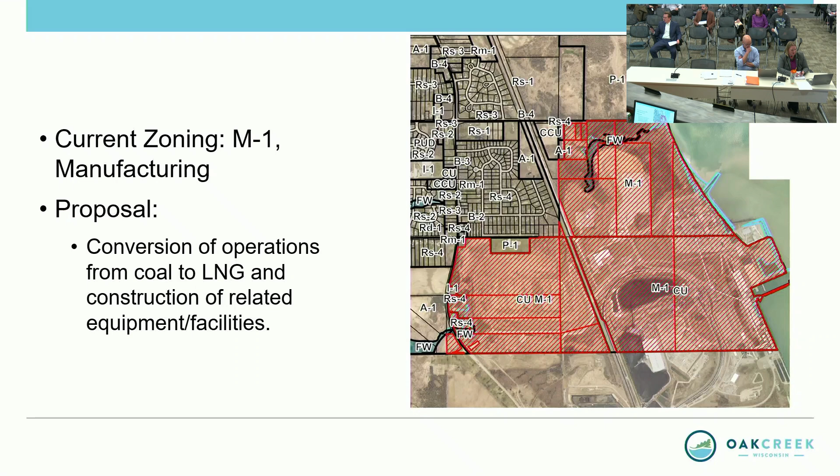Thank you, Mr. Mayor. The item before you is a conditional use permit amendment. We Energies went through a conditional use permit process in 2003 for their coal operations, and this proposal has been very public. They're in the process of converting their operations from coal to liquefied natural gas, which will require construction of related equipment and facilities. The exterior plans for the buildings will be reviewed by the Plan Commission at a future date. This item before you is for the conditional use permit.

As I mentioned, it's an amendment. The category in our zoning code is major utility, which is pretty broad for a lot of reasons. Obviously, We Energies and their facility falls into that category. They are converting all their units to natural gas by the end of 2032. It's a long process, just starting the approval process right now.

The coal piles will eventually be removed. The large main pile will be replaced with a new storage tank. And then there will be conversion to include construction of 5 natural gas-fired combustion turbines.

The public hearing may be scheduled as early as Monday, February 17th. That public hearing will be in front of the Common Council. So the Plan Commission's role this evening is to provide a recommendation to the Common Council. The public hearing for public comment is held in front of the Common Council on that Monday, February 17th. It's oddly a Monday. There is an election on Tuesday, February 18th, so just a side note there.

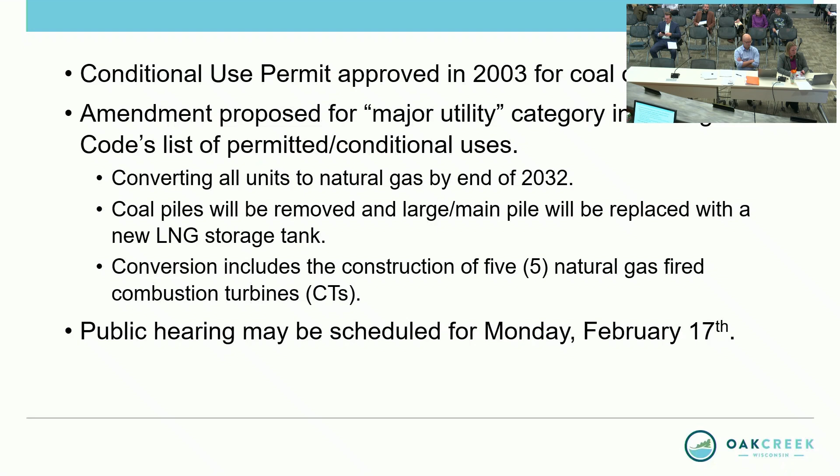The conditions and restrictions, as you may recall, last month we talked about combining what used to be 2 agenda items into the conditional use permit and conditions and restrictions, considering both of them this evening. I'm not going to go into all detail, but the basic restrictions are that it's a public utility use. The operations are obviously 24/7, 365 days a year. The 2003 conditions and restrictions are very, very detailed. They went over easements, construction hours, shifts, water supply, traffic, construction traffic, main traffic being limited to Highway 32, and noise levels of operation and during construction.

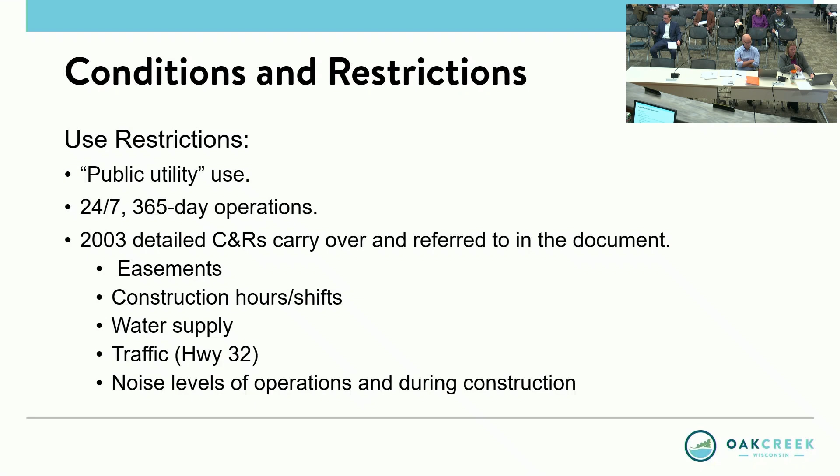And those 2003 conditions and restrictions are carried over with the new document. It references the conditions and restrictions from 2003. With that, I would like to turn it over to We Energies representatives, who will give a much better rundown of their operations than I will. They have a presentation that was provided in your packets, but with that, I'll be turning it over to Rick O'Connor with We Energies.

Oh, Rick is not done. I'm sorry. Thank you. Do you want the clicker, or do you not need it for Rick? Okay, my thing is just going to be really quick before Rick gets up here.

So, good evening. My name is Jennifer Bogner. I'm the Director of Local Affairs at We Energies. We're here in front of you tonight, obviously, to talk about the Oak Creek facility, but I just wanted to give you a little background on the reasons why and sort of our overall plan.

Some of the drivers that we have seen for what we're doing is economic development. We all know about Microsoft, we know about the need that they have, but there are plenty of other economic development projects in Oak Creek and other places in this region. We have bigger companies that are adding on. Eli Lilly just announced a big project, Haribo, Uline, and we have to address those needs. So that's one of the big drivers. A second reason why we're doing this is there's been some shifts in the rules that govern us. MISO is our regional grid authority.

They do all the grid planning for this part of the country, and they've shifted the way they look at things. In the past, they've taken the peak for the year, summertime here, and done all their planning around that one peak. What they've done is shift to a seasonal peak model where they look at each of the 4 seasons and plan around the peak for each season, which shifts the way they do things.

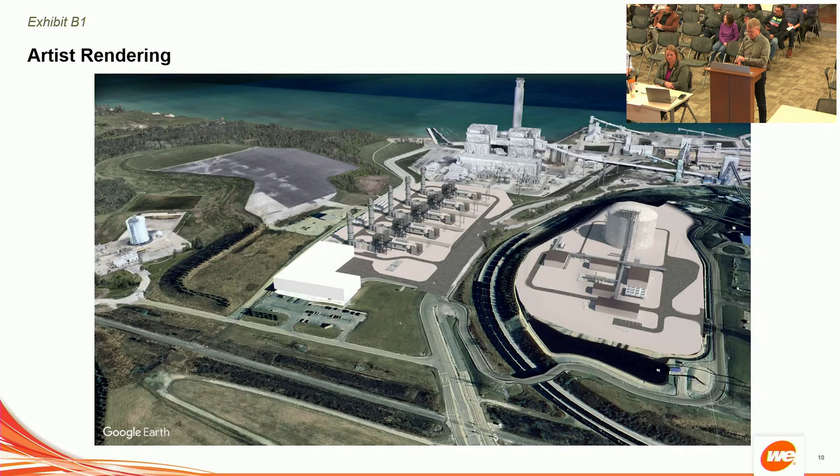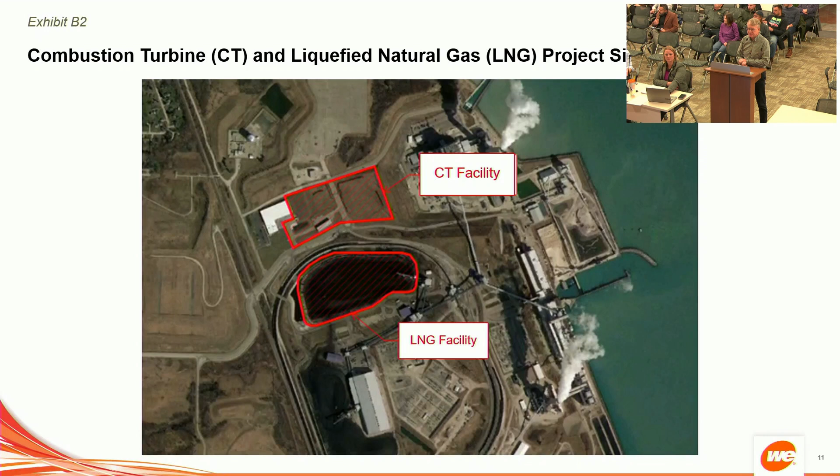The combustion turbine project will include 5 General Electric combustion turbine generators. This really is the workhorse of the industry. There's probably 1,000 General Electric combustion turbines out there in the U.S., and around the world in operation today. It came out in the 1990s. We have quite a few GE 7F combustion turbines in operation. It's a reliable machine, and it's also a fast start machine.

So it'll complement the coal plants, and it'll complement the wind and the solar, so it can follow the electric load and make sure we're able to provide power to the customers. It has an expected capacity factor of 20%. So this will be a little bit different than the coal plants—it will not be a base load plant, not going to be operating all the time. It's really intended just to fill the gaps for when the renewables are not available.

We will have a new natural gas line that'll come in through Racine County into the site. It's called the Rochester Lateral, and we'll also connect into the Lakeshore Lateral. That'll bring additional natural gas into this area.

We will interconnect to the ATC substations. ATC is the transmission company. It's one of the reasons why we're locating this plant at this site. Essentially, this is where we plug the 5 combustion turbines into the grid. There are 2 existing substations there already. When we shut down the coal plants, essentially we're going to unplug the coal units and replug the 5 natural gas combustion turbines back into those ATC substations. It's a pretty long, complicated process to get approvals to plug into the grid, so it's a significant benefit to be able to utilize these existing substations, as well as a significant economic benefit.

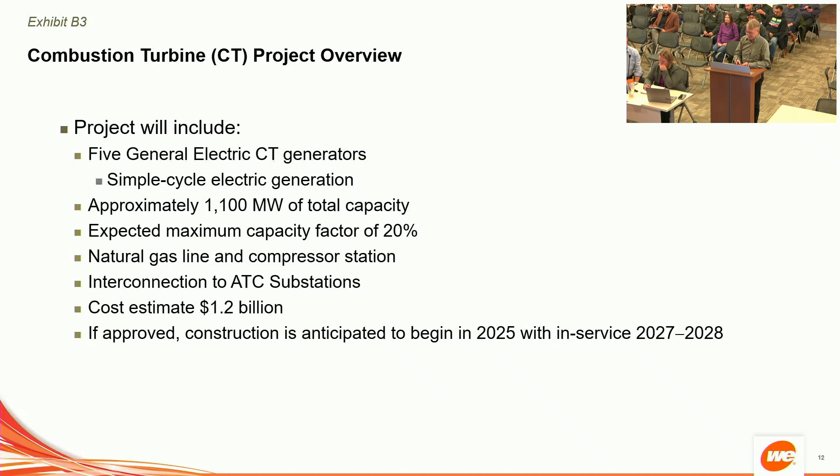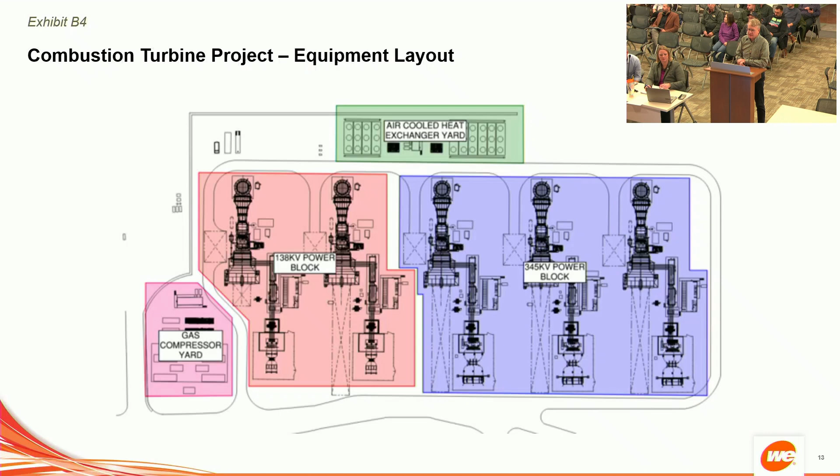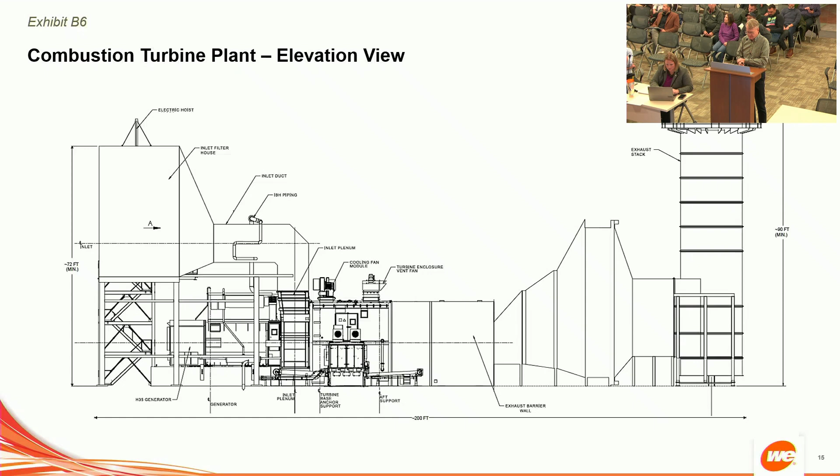Switching over to the liquefied natural gas project, quick overview. What we're proposing here is very similar to 2 projects that we just built. We just built 2 1-BCF liquefied natural gas tanks, one out near Whitewater, one up near Ixonia.

This is a cold day. We're glad to see that they're operating today to provide LNG into the gas system, really for heating homes on cold days like we have today.

There's really 3 components: the tank, the liquefaction equipment, and the liquefaction equipment is really like refrigeration equipment. We're converting the natural gas in vapor form into a liquid, and in liquid form you can store 600 times the volume of the vapor. That's the reason we're turning it into a liquid.

We put that liquid into the tank, and then in the winter, on cold days just like today — we've been running for about 30 hours on the project out at Whitewater — we pull that liquid out, we warm it up in what's called a vaporizer. It's really just a warm water bath. You warm it up and it turns right back into natural gas, and you put it right back into the system.

So the benefit is, it kind of acts like a coal pile. You have a local storage of fuel right here. You're not dependent upon a pipeline coming from Texas or Oklahoma.

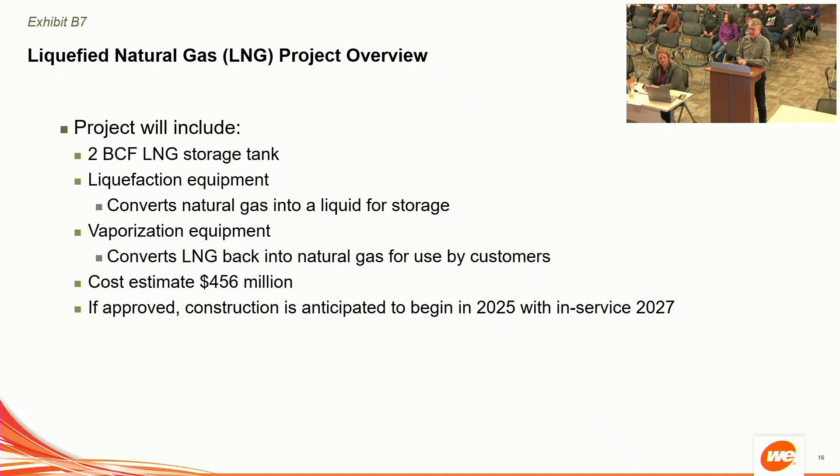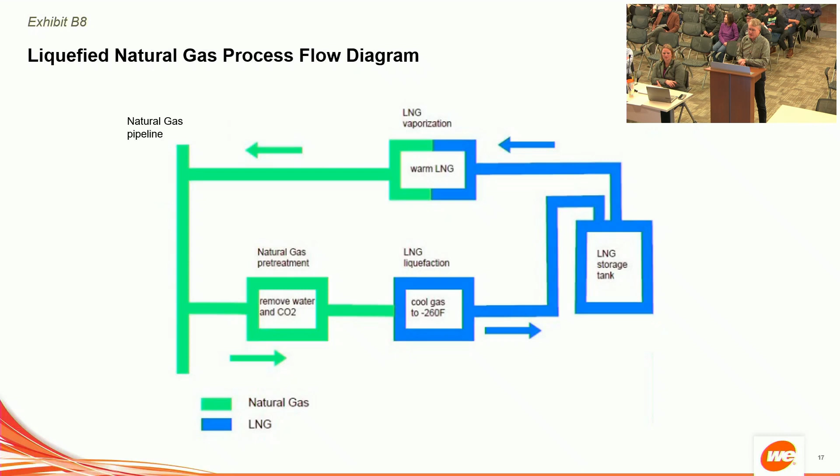You put that liquid in the tank, and we really run that liquefier all summer to fill the tank. Then on cold winter days, or any other time of year where we're coming up short on natural gas, we pull that liquid out, warm it up, and put it right back into that same pipeline.

It's a pretty straightforward process, and you're probably aware there is a smaller LNG tank already on the Oak Creek site. It's about a quarter of a BCF, and that was put in, I believe, 1965, so it's been there for 50 years. This really is the same process, same concept as what's been out there since 1965, but on a larger scale.

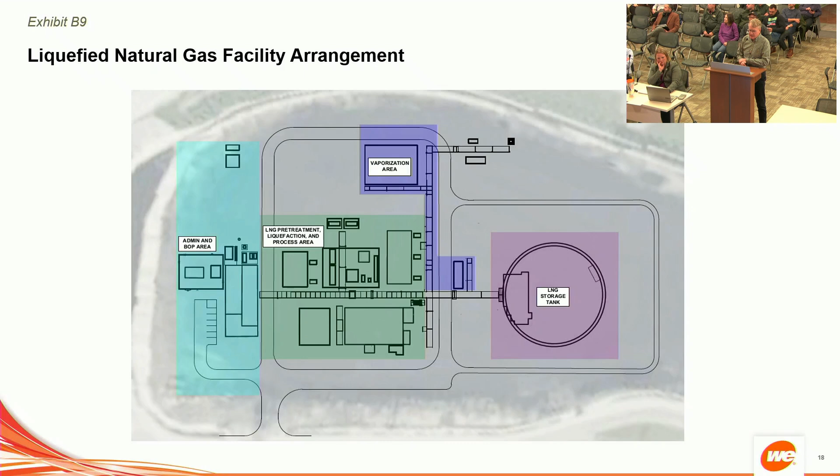I won't go through all the detail here unless you have questions. It's really just the layout of the equipment. Probably the big part is the tank itself. The tank is at its highest point 170 feet high, 206-foot diameter, and there's really 2 tanks.

This is what's considered a full containment tank. On the inside, there's an inner tank made out of 9% nickel, which is the alloy capable of holding the low temperature liquid in the tank. On the outside, it's a carbon steel tank with up to about a 3-foot concrete containment wall around that.

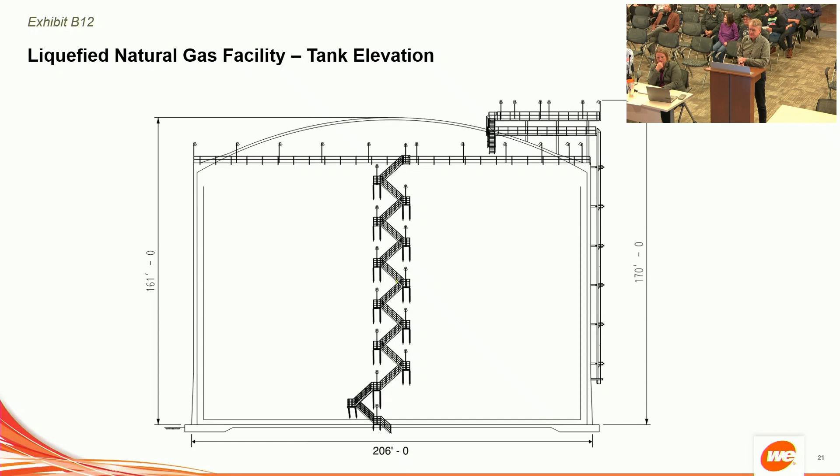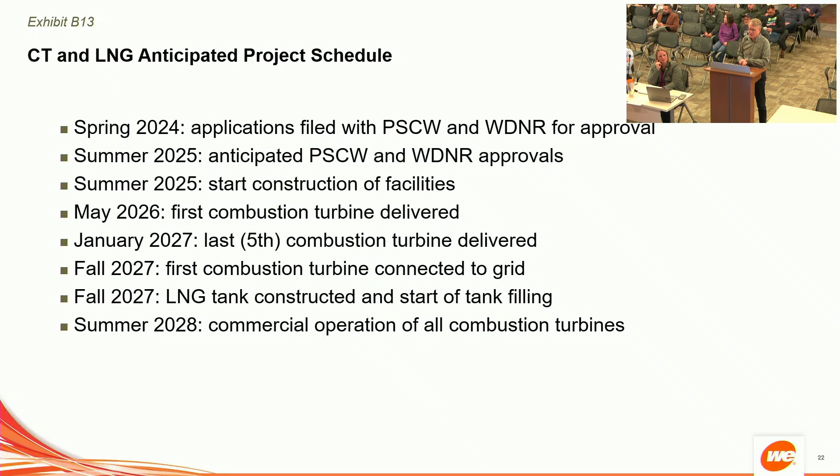We'll get that first combustion turbine running, connected to the grid by the end of 2027, as well as get the LNG tank constructed and starting to fill by the end of 2027. Then that last gas turbine, of the 5 turbines, will be put into operation during the summer of 2028.

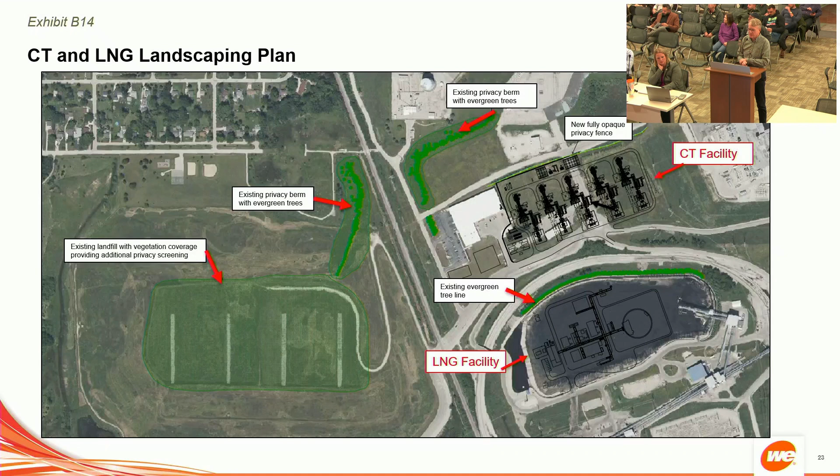So a lot of info, but we can certainly come back. This is just a quick overview of the landscaping plan. A lot of this landscaping has already been installed, and a lot of the berms have already been installed as part of the Elm Road project.

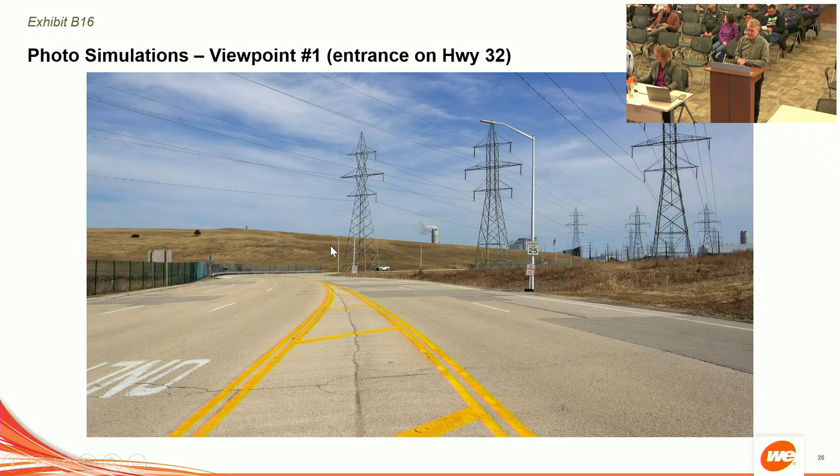That's what's right there. We do have another view from Haas Park, essentially on the east end of Elm Road, where you'll get a view of the 5 combustion turbine stacks, and over to the right there you'll get a view of the LNG tank. So these are photo simulations, just really intended to give you a feel for what the facility would look like from the neighbor's perspective. Haas Park, as you're probably aware, is the park right over by Barton Oaks subdivision.

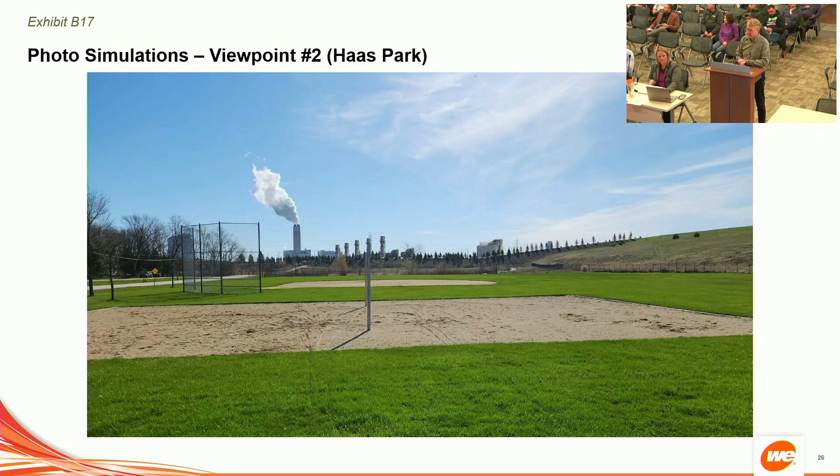This really is the nearest neighborhood to the Oak Creek site. That's a little closer on Haas Park, right at the end of Elm Road. You get a closer up view of the combustion turbines, as well as the existing LNG tank, the blue tank off to the left there. Again, that's the tank that's been in there since 1965, and that is it. Thank you.

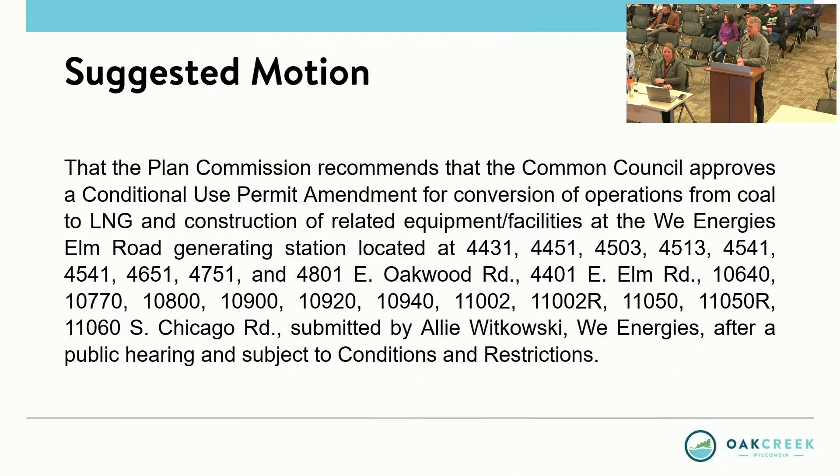Number one, production. Does the production of the liquid gas match the current production you had with the coal previously, or is it more or less—how is that matched? Do you have a chart that shows the analysis? That's a good question. The way the LNG works is we essentially fill the tank up. It holds 2 billion cubic feet of natural gas, and that'll take us about 200 days in the summer to fill that tank. We run that all the way until you get the tank full.

Then at times when we're low on natural gas, typically in the winter on a cold day like today, we will draw that liquid out of the tank and run it either to the combustion turbines, or it's connected to the natural gas distribution system, where it goes to homes to provide natural gas for heating on their furnaces.

The hours of operation—is it going to be 24/7? Yeah, hours of operation will be 24/7. These facilities could operate at any point. These are really peaking facilities. The gas turbines are peakers. This is when we need electricity, that's when these units operate. They are expected to only operate about

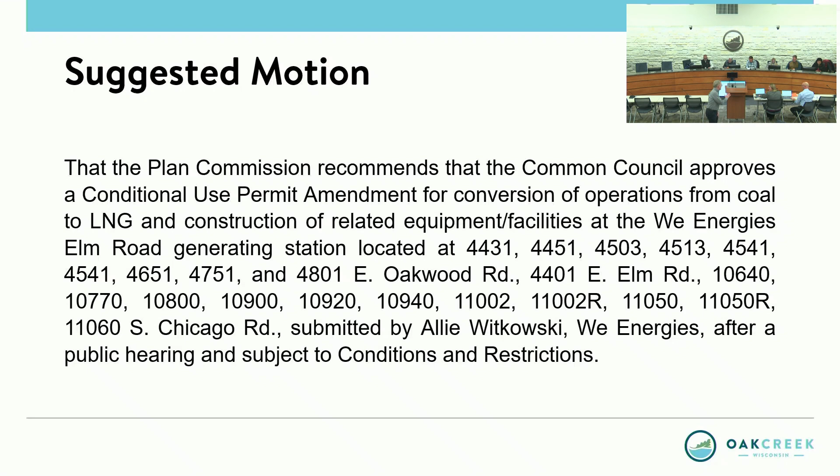Okay, moving on. Item 5 is a site review plan related to the construction of a new ATC control building to be located at 10770 South Chicago Road, submitted by Sarah J. Lamp, ATC, LLC.

Christie: Thank you, Mr. Mayor. This item is related in some minor shape or form, mostly because it's on the We Energies property, but this is a really small proposal for construction of a new control building buried deep within the transmission field that no one will even see.

Just want to make also a side note, there was a typo in the report. I accidentally did some copying and pasting and forgot to delete the last 3 paragraphs in your report. Should test who caught that. So my apologies for that.

But the proposal is to construct a new control building, shift it a little bit further north than its existing location. It's constructed of corrugated metal, not a material we typically would approve at the Plan Commission level. However, given the small size of 24 by 60 foot building and the fact that absolutely no one will see this building, staff is recommending approval for that main reason.

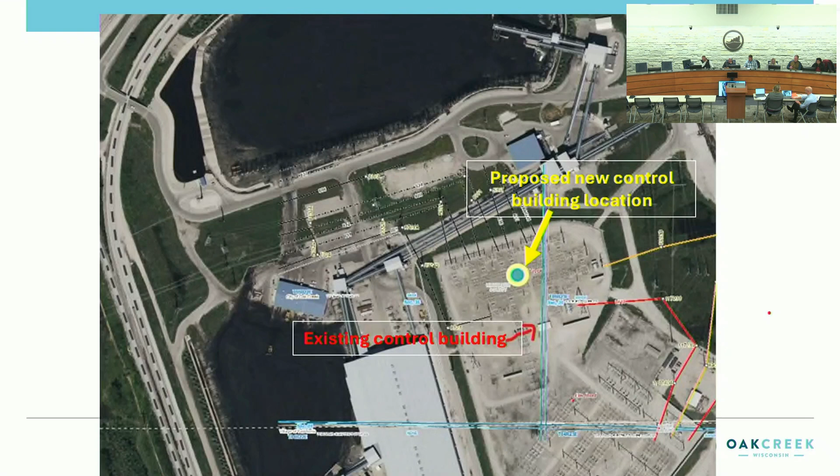Guzekowski will second. Roll call, beginning with Ashley. Chinsky, aye. Lorick, aye. Kavich, aye. Guzekowski, aye. Anna, aye. Ouch, aye.

Item 6 is consideration of a certified survey map combining the properties at 8910, 8940, 8980 South Ridgeview Drive, submitted by Ivan Basilic.

North Investments LLC. If I butchered your name, I'm sorry, I apologize for that. Christie, thank you. We're laughing because I just realized I'm advancing the slides on my own laptop and wasn't advancing them for you guys. I'm sorry, controlling two laptops at one time here.

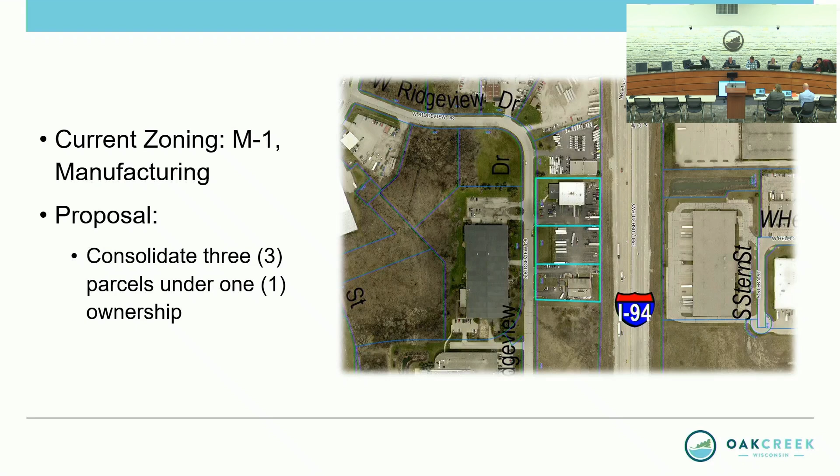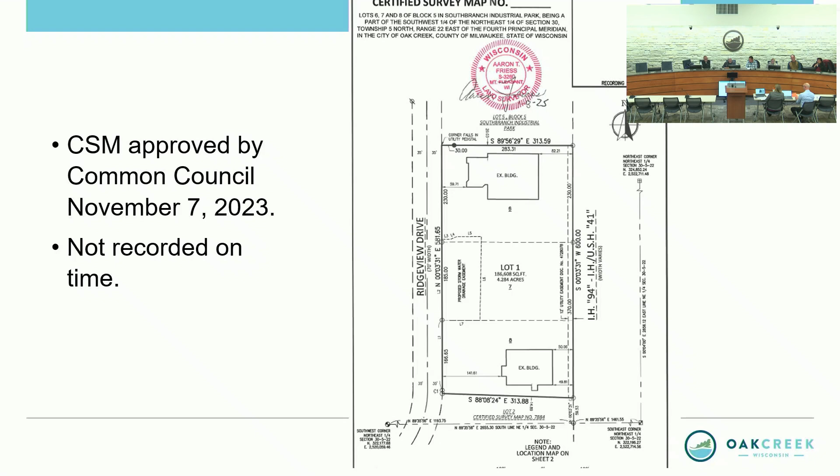Thank you, Mr. Mayor. This item was before the Plan Commission a little over a year ago and was never recorded. This is to combine 3 parcels under the same ownership. It was reviewed and approved by the Common Council on November 7th, unfortunately not recorded on time. State statute states that the approval becomes null and void if it's not recorded within 1 year of approval. So it's pretty straightforward, and staff is recommending that the Plan Commission recommend Common Council approval, and we'll make sure to get this recorded as soon as possible.

Ashley, anything? No questions. Greg? No questions. Chris? No questions. Christine? No questions. Steve? No questions. I myself have none either. It's just an unfortunate miss.

So, if there's no further discussion, motion on 6: Clerk moves to recommend to the Common Council that the certified survey map submitted by Ivan Vasilievich, North Investments LLC, for the properties at 8910, 8940, and 8980 South Ridgeview Drive be approved with the following conditions: Number 1, that all technical corrections, including but not limited to spelling errors, minor coordinate geometry corrections, and corrections required for compliance with the municipal code and Wisconsin statutes, are made prior to recording.

Guzekowski will second. Roll call, beginning with Greg. Lorick, aye. Kavich, aye. Guzekowski, aye. Anna, aye. Ouch, aye. Chinsky, aye.

Item 7 is a site plan review: to review site and related plans and landscaping modifications to TNT Express, an existing building located at 8910, 8940, 8980 South Ridgeview Drive. Christine?

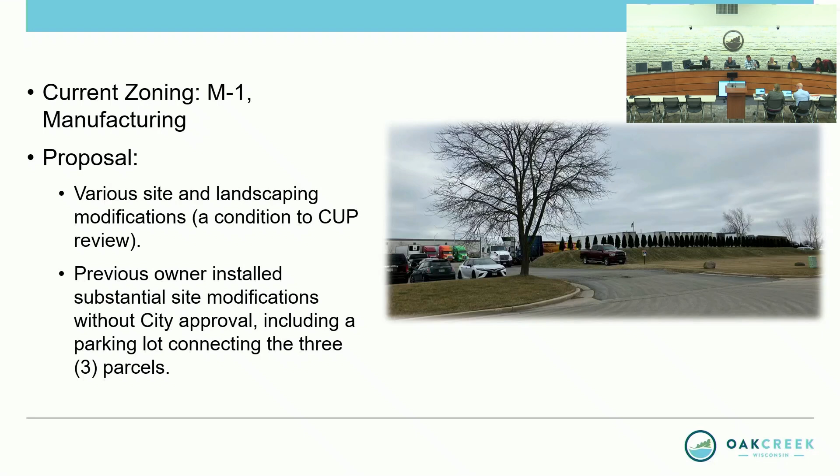This is a chopped-up panoramic view. It's a really long site from Ridgeview. You've got a building on the very north end at 9810, the middle piece which is paved without city approval, and also the landscape berm on the west side of the property. Then you have a second building at 9880 on the south bookend of the property—so three pieces tied as one here. What's proposed is to install landscaping on the very east; north is to your left in this view, so the east abuts the interstate and the west is Ridgeview, and the green shaded areas are new landscaping that's proposed.

It's a big sea of asphalt on this site. And with that being said, the middle area was paved without city approval, so stormwater management and retention is necessary.

The berm that you see here, the previous owner installed thinking this is a good solution to screen the semi trucks that are being worked on and parked there. Unfortunately, it doesn't meet the stormwater management requirements.

Engineering is working and having constant communication with the consultant, and the city's consultant, R.A. Smith, has commented back about some modifications. We're making progress on the stormwater management plan that's been submitted. That berm will actually be removed, and a retention area will be installed with some landscaping, not as substantial as what was there, but we have stormwater management requirements that need to be met.

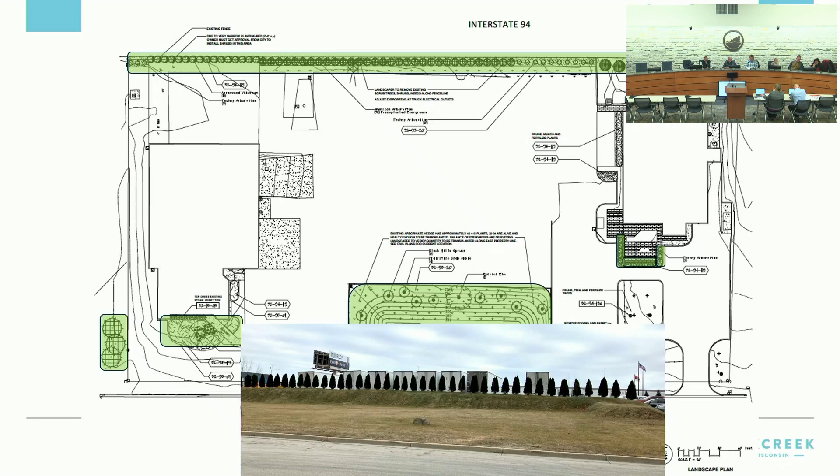Again, the semi-trailers are being worked on. That's the user, the tenant is auto repair of semi-trailers. That's why the large area in the middle for parking of semi-trucks is necessary.

With that being said, that's the conclusion of the proposal for the site modifications, and staff is recommending approval subject to the conditions in front of you.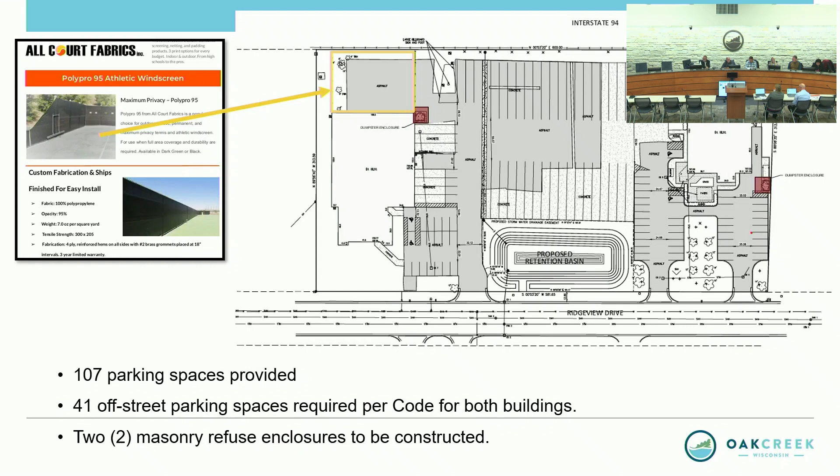Really no further comments, other than you inherited a property that had a lot of improvement needed because the former owner just kind of took it upon himself to do what he was going to do. But I'm glad to see you're taking time and doing it right, and just want to express appreciation of the staff and the city to do things right. We do value you as a business, but we do want to do things correctly here in the city of Oak Creek. With that, I have nothing else, so we can move on to a motion.

Clerk moves to approve site and related plans for site and landscaping modifications at TNT Express, an existing business located at 9810, 9840, and 9880 South Ridgeview Drive, submitted by Ivan Vasilievic, North Investments LLC, with the following conditions: 1, that all relevant code requirements remain in effect; 2, that revised plans be submitted indicating the fence height and required parking calculations per code; and 3, that all revised plans are submitted in digital format for review and approval by the Department of Community Development prior to the submission of permit applications.

Guzekowski, second. Roll call, beginning with me. Bukevich, aye. Guzekowski, aye. Anna, aye. Ouch, aye. Jinsky, aye. Lorick, aye.

Item 8 is conditional use permit with conditions and restrictions. It is the review of the request for that conditional use permit, along with conditions and restrictions, for an animal daycare, recreation, and kennel boarding facility shelter at Houndstown USA, a proposed business to be located at 7126 South Millers Way, Suite 101, 102, submitted by Andrew Cromie, Cromie Corporation.

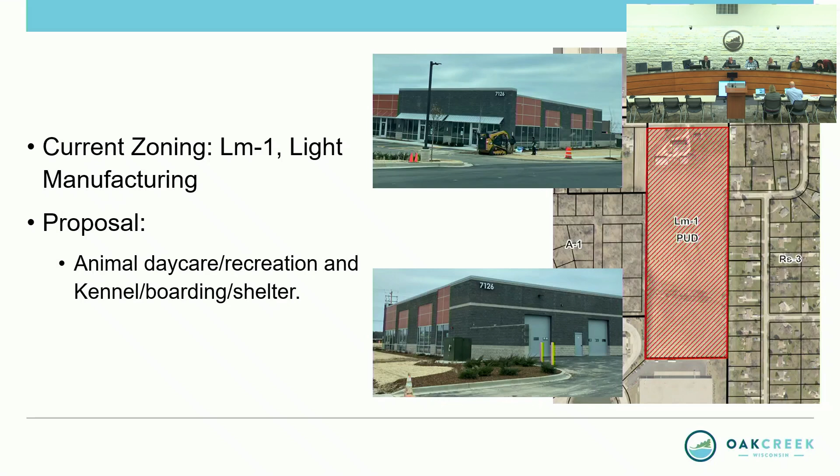Thank you, Mr. Mayor. The property, located on South Millers Way and East Rawson, used to be 517 East Rawson. It's zoned LM Light Manufacturing and is the site of a new multi-tenant light industrial building. Houndstown USA is looking to occupy part of the building and is seeking a conditional use permit for animal daycare, recreation, kennel boarding and shelter. Here are a couple of photos of the new building and the portion they'll be occupying.

They'll be occupying the phase 1 building, the western two suites, suite 101 and 102, which is approximately 6,000 square feet.

Here's an idea of how they'll be using the space. The pink area is for the daycare portion, the yellow with kennel areas is for boarding dogs, and the purple area is for grooming. Those will be the main uses of the building.

They say they have a capacity of up to 90 dogs, but more likely would have about 50 dogs on site at any given time. They will be boarding dogs 7 days a week, 24 hours a day, 365 days a year, but will have operation hours for drop off and pickup for daycare: Monday through Friday 6:30 to 7, Saturday 7 to 5, and Sunday 11 to 1.

You received full conditions and restrictions in your packet. To run through a couple: they will be required to have sound dampening walls built parallel to the demising walls to mitigate sound. There will be no outdoor activity or operation permitted, including dog runs or play areas outside, and they won't be allowed any outdoor storage on site.

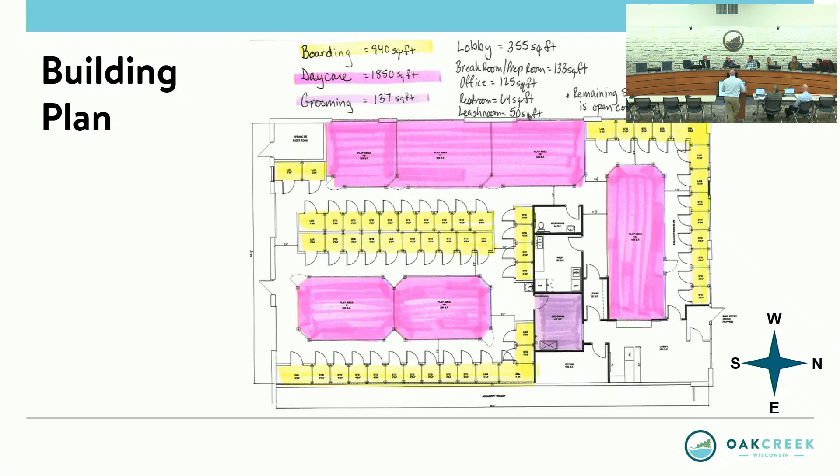I'm sorry for bringing it up, but I think we should restrict conditions to the local ordinance on how many dogs are allowed in a boarding facility. We went round and round with this for the new Brentwood facility, the Camp Bow Wow. I thought it was over 100 though.

Yeah, so it is under the kennel and boarding facility section, under service uses: dogs kept on premise will not equal more than 15 per acre of land. Todd had done the calculations and it's underneath that, it meets the code. Okay, take your word for it.

And dog runs shall not be used between 8 p.m. and 8 a.m., which doesn't apply here since there's not a dog run. The calculations, was it 20 for the cats? Minimum lot size for a kennel shall be 2 acres, which this meets, it's a really large property.

Okay, but thanks for bringing that to our attention, we'll double check. And then lastly, Amy, don't mean to throw you to the dogs, bad pun, any concerns from fire? Yep.

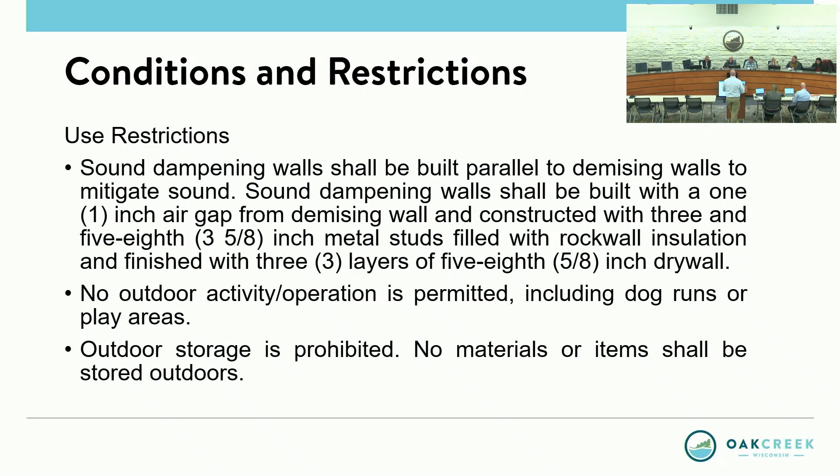Oak Creek Fire Department: for these animals that are there for 24 hours, what's the life safety plan for these animals? Should something happen in the building, as far as exits and a firefighting operation of rescuing these animals that are in there without humans?

Our facility will be sprinklered, and there are access points both in the front and rear of the facility. Nobody's there overnight, so should that emergency happen, the fire department would be rung up right by the sprinklers and they would be on site. We would be called by that fire safety system, so we would be coming as well. Does that answer your question, Amy? Okay.

Otherwise, no, I have no further questions other than the two I brought up. So if there's no further discussion, motion?

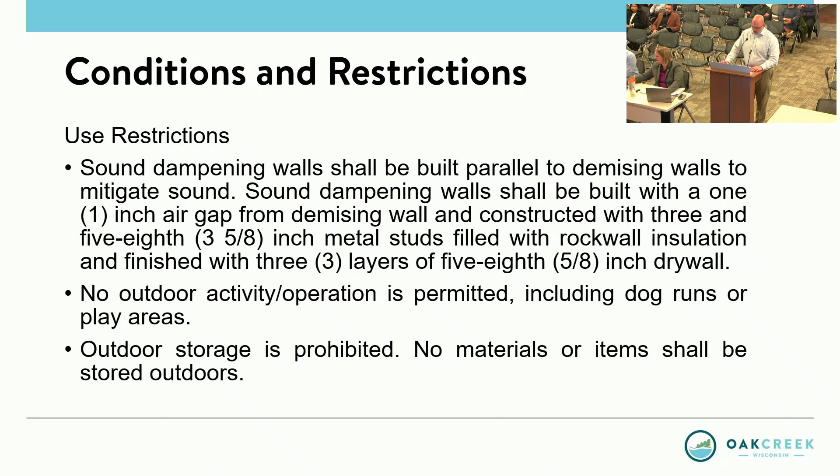York moves to recommend that the Common Council approve a conditional use permit for animal daycare, recreation, and kennel boarding shelter for suites 101 through 102 on the property at 7126 South Millers Way, submitted by Andrew Cromie, Cromie Corporation, after a public hearing and subject to conditions and restrictions. Guzekowski seconds. Roll call, beginning with Chris.

Guzekowski, aye. Anna, aye. Ouch, aye. Jinsky, aye. Lorick, aye. And, excuse me, Bukevich, aye.

Item 9, we'll review a request for a conditional use permit along with conditions and restrictions for permanent outdoor storage at Kalik Building Services, an existing business located at 3834 East Puetz, submitted by Mohammed Kalik, Kalik Builders.

Christie or Todd? That's me. Yes, as you mentioned, the property, which is zoned M1, is occupied by Kalik Construction Services, and they're seeking a conditional use for an outdoor storage permit for storage shipping containers. I have pictures up of the existing building, viewing it as you're coming up, going east or west on Puetz.

As you can see from the site plan, they are proposing to have those storage shipping containers in the rear lot, at the north end of the property. They're proposing to have 8 containers in total, 4 of them 8 by 40 and 4 of them 8 by 20 in dimension.

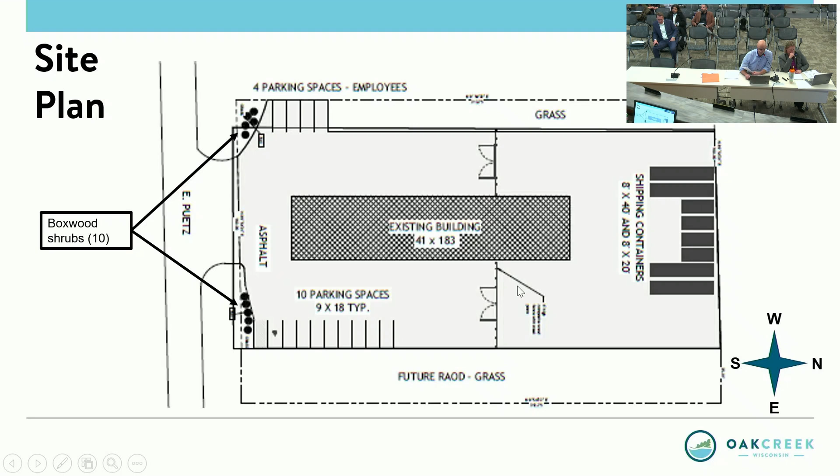They'll be planting 10 boxwood shrubs along the right-of-way to act as screening, and in addition putting up a fence on the property parallel to the road, a little bit past the building at frontage, to provide for screening. The fence is going to be a 6-foot high composite fence, and they provided a couple examples of what it will look like.

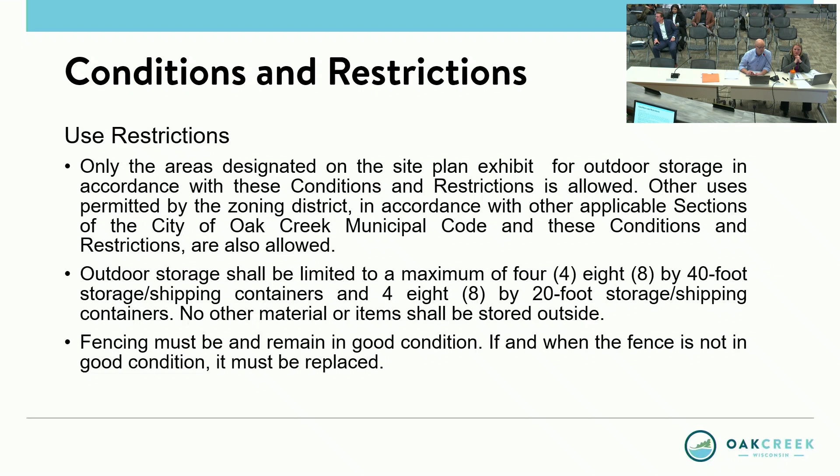Just a couple highlights on some of the conditions: the approval will be for storage of these containers only as shown in the location on the site plan, and they'll be limited to the number of containers shown, being 8 in total. They must have the fencing, and it must remain in good condition, and if it's not, it must be replaced. So if you're comfortable with the proposal, we have the recommended motion.

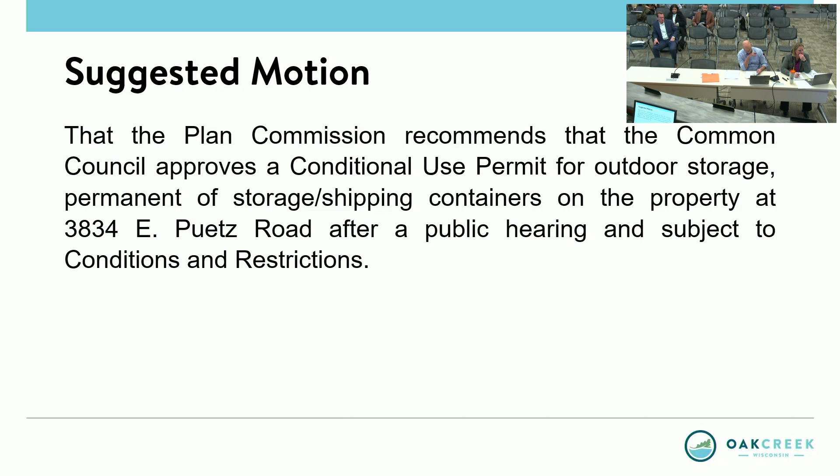Okay, does the applicant want to say a few words? Or wait? You'll wait? Okay, where did I start? Chris, wanna start us off?

No questions. Christine? I have no questions. Steve? No questions, looks like a nice looking fence. Ashley? No questions.

Greg? A couple questions. The first one, this might not be related at all, but can you go back to the aerial view of this site? This may be an old picture, but what are all the cars? Are those all employees? I will need you up at the podium, sir, name and address.

Mohammed Khalek, 3834 East Puetz Road. No, this is a very old picture. Oh, so that's not currently what it looks like. Yeah, okay, I wish I owned that many cars, but I don't. It's from 2022.

Secondly, the storage in the containers, is this temporary, or is this going to be long-term permanent storage? No, basically when we're working on a project, for lead time we pre-order material and get it stored. When it's ready to be delivered to the job site, it gets delivered. Does the whole container move then? No. Are these containers always going to be there? You're just going to rotate the inventory? That is correct.

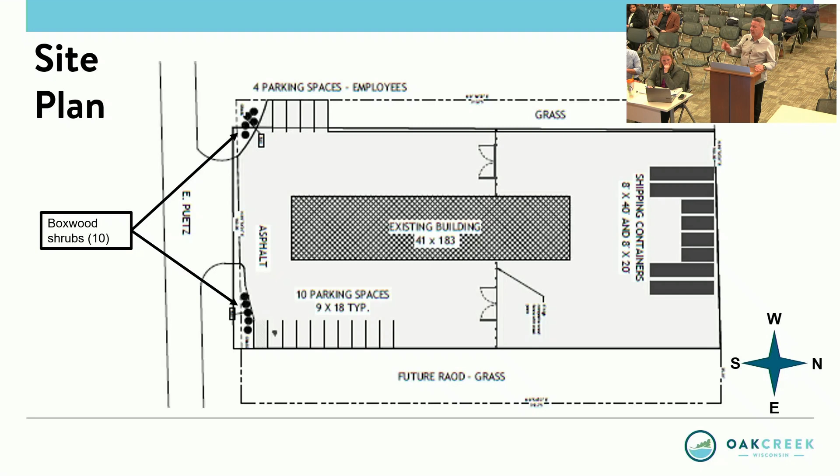My question is, I'm actually happy that he's doing this. One of my questions to the gentleman is, what is the plan heading west to that building? In the picture you show, it looks awesome, but to the west is just a broken down fence, an old boat, and I can literally see it from my backyard. So I'm happy he's doing that and not opposed to the new stuff, but my question is, maybe not for now, but what's going to happen to the west part of that space? It's probably twice the size of the current lot, somewhere around that length.

Okay, we'll get the applicant up, maybe he can answer for you. Sir, could you come on up, please, and answer his question.

It looks a lot better than a few years back. But I would ask you to turn your light down on your side. The what? The light on the sign? Yeah. Yeah, I'll check on that.

So we purchased the lot to the west, I believe we closed on it last year, and of course from the county we inherited some contamination there, DNR related. So we're currently working on that. We do plan to clean it up eventually, but we're letting it go through the DNR process. And like I said, we're planning on proposing something for the addition, and I promise you it would not look like that.

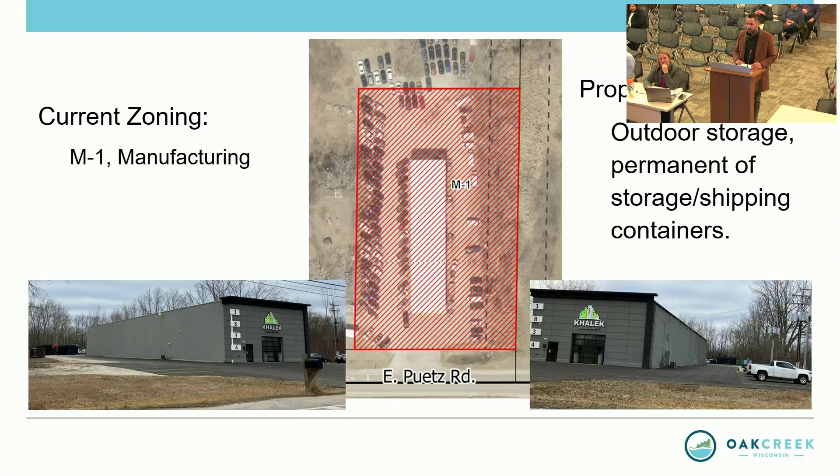Okay. Is there an expiration to these conditions and restrictions? So if you wanted to, you could just use containers to store material. I mean, forever—a conditional use is outdoor storage permanent.

Fire, anything? Christine, after discussing this a little bit, are we gonna give a certain time frame for how long we're gonna allow this outdoor storage of vehicles, especially if you get the DNR clearance, because we don't want to issue the permit and then come back and say, well, I'm not gonna build it. You know what I mean?

So the DNR discussion is on an entirely different property. I'm under the understanding that past practice was to put time limitations on some conditions and restrictions. Uh-huh, that is...

It's more of a longer, bigger policy question that we haven't quite concluded. You can't pick and choose which items to put time restrictions on, and there may have been some past practice that I don't want to continue—some uses get a time restriction and other uses don't.

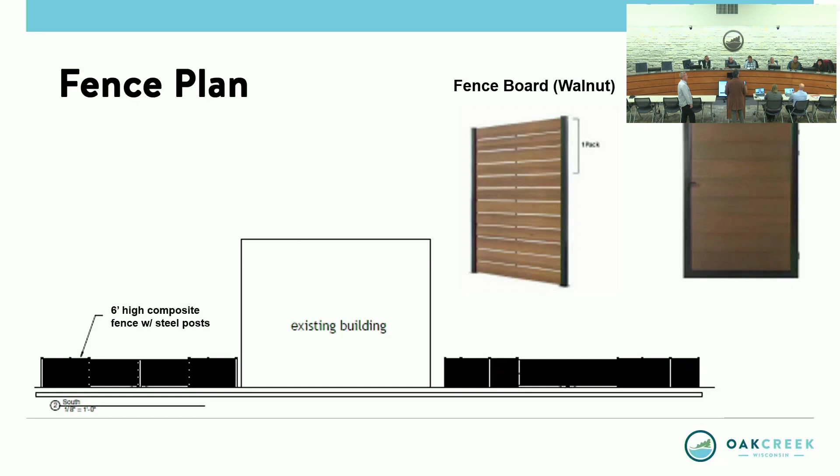So we just have to put this on the side and we're just looking for the outdoor storage and the fencing, purely. Correct, yeah. Okay, that's what's before you today, is just the outdoor storage, the conditional use permit for permanent outdoor storage behind the building, solely on this property that's highlighted in red on the aerial photo in front of you.

Mr. Khalek has purchased the property to the west from Milwaukee County, which has environmental issues, and that will take some time because going through the environmental remediation process with DNR is a bit of a slow, expensive process. I think our code enforcer, our neighborhood preservation officer, Tamira, has been working with Mr. Khalek on this particular property. And also, I think we'll have a little bit further in-depth conversations about the storage of items on the Milwaukee County, previously owned Milwaukee County parcel to the west.

Thank you. Okay, does that kind of answer your question, sir? Great. And if you can just, I know it's not on this agenda, but if the light is shining, we do have light codes for stray lights and try to be friendly to our neighbors. Maybe it might need a shield if there's a shield light, any lights, I'll remove them. No, you don't have to remove them. Maybe just a shade is needed to get some downward light to it. So I think you're referring to the spotlight, to the actual sign?

Yeah, I'll call them, yeah. Okay. We appreciate the no effort problem, no problem, cooperation.

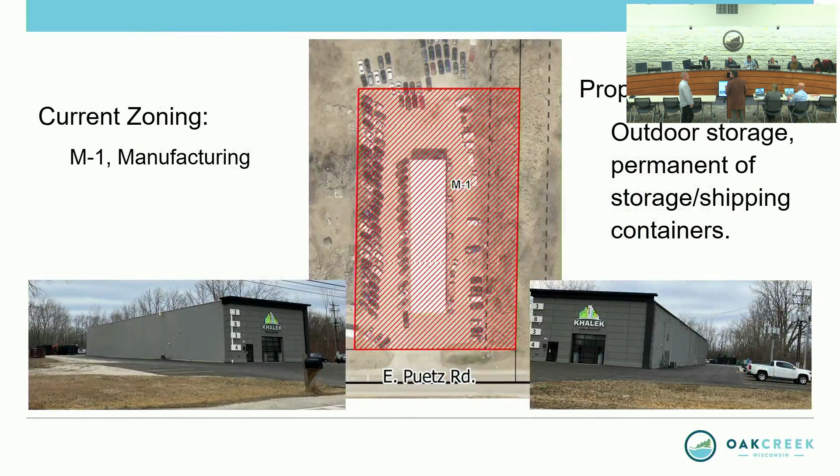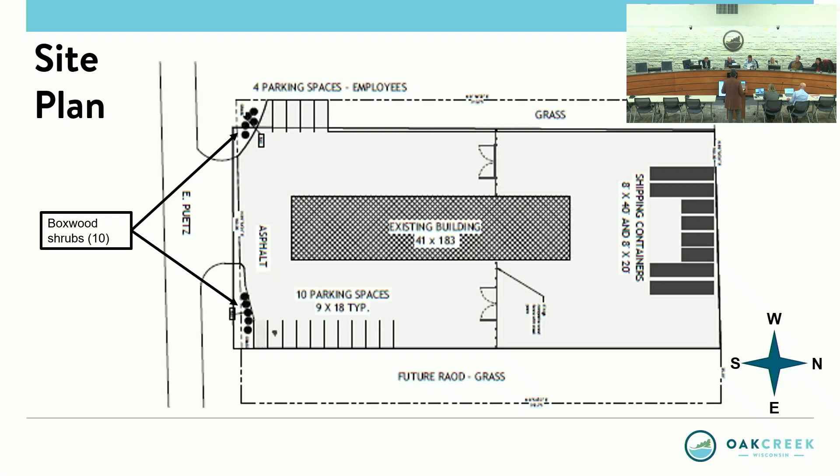And then as far as the fencing, if that's something you guys want us to address, I'm willing to get that boat removed. That would really come down to our compliance officer, and you can work through them on it - it's really not part of this subject matter. Correct, but again, as I said, with TNT Trucking, we appreciate a certain look for the city, and we want you to run an A1 business that looks A1, and we want everything around it to look that way. So appreciate the cooperation, thank you guys.

Okay, there's no further discussion. Motion.

York moves to recommend that the Common Council approve a conditional use permit for permanent outdoor storage of shipping containers on the property at 3834 East Puetz Road, after a public hearing and subject to conditions and restrictions. Guzekowski will second. Roll call beginning with Christine. Hannah, aye. Boucher, aye. Chinsky, aye. Lorick, aye. Gavich, aye. Guzekowski, aye.

Okay, item 10 is site review plan.

We will review site and related plans and modifications for Blifford Lumber and Hardware, an existing business at 8626 South 13th and 8626 South 10th.

Todd, yes, thank you Mr. Mayor. So this property, like you said, is on South 13th Street, South 10th Street, just north of North Branch Drive. It's zoned M1 manufacturing, and just last year the western of the two lots received, or was granted, a conditional use for outdoor storage. So maybe you recall that.

And it's currently occupied by Blifford's Lumber and Hardware. They have buildings on site currently, which you can see in these photos here of what's there currently. But so now they are looking to expand, and they're proposing to construct a roughly 1,600 square foot showroom warehouse building on site. They're looking to do parking pavement improvements, put in that outdoor storage area, and create an access drive east to South 10th Street.

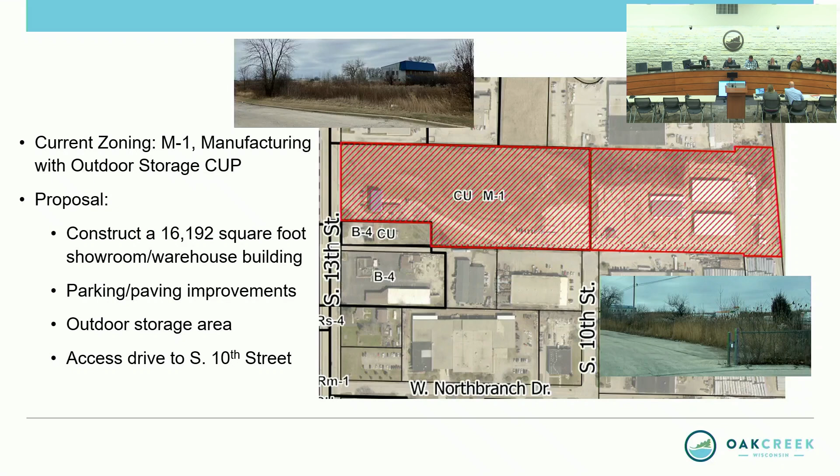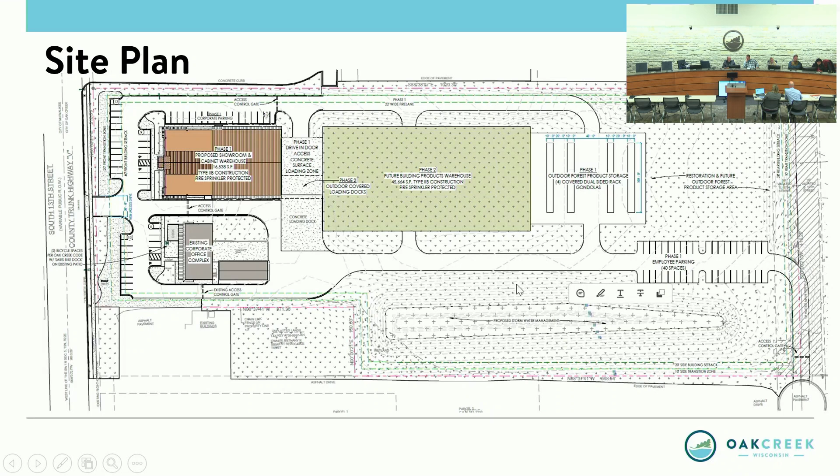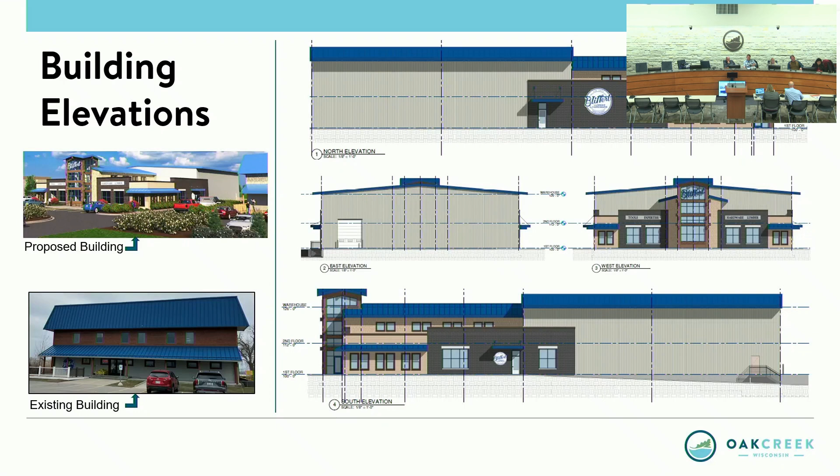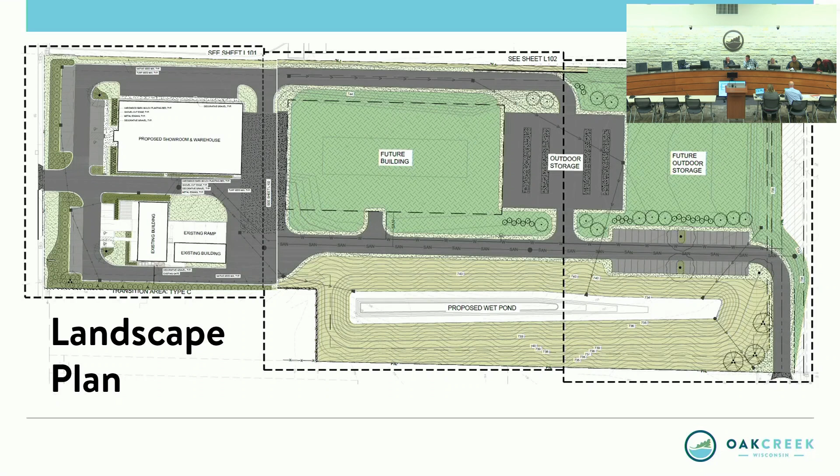So if the Plan Commission is comfortable with what's presented, we have a suggested motion for you.

Thank you, Todd. Does the applicant want to say anything, or just wait on questions? Thank you, sir. Christine? I have no questions, thank you. Steve? Great improvements, no questions.

Ashley? The city's had several different meetings with the project team over the last year or so, and with what we're seeing here with preliminary design and whatnot, we have no questions, concerns, or anything at this time. Greg? No questions, everything looks really great. Chris? Yes, looks great as well. I agree. Amy, anything from fire? Concerning access, anything like that?

Jeb, Oak Creek Fire: no concerns at this time. Okay, all I can say is, wow, nice looking building. It's nice, very nice. As long as fire's good with access and everything like that's worked out, Ashley's happy, the world's happy, so.

If there's no further questions, motion. York moves to approve site and related plans for the construction of a plus or minus 16,192 square foot showroom warehouse building at Bliffert Lumber and Hardware, an existing business located at 6826 South 13th Street and 6826 South 10th Street. Submitted by Greg Prosson, Consortium AE LLC, with the following conditions: that all relevant code requirements remain in effect, that all approvals and or permits from the Milwaukee County Department of Transportation are provided to the city prior to the submission of permit applications.

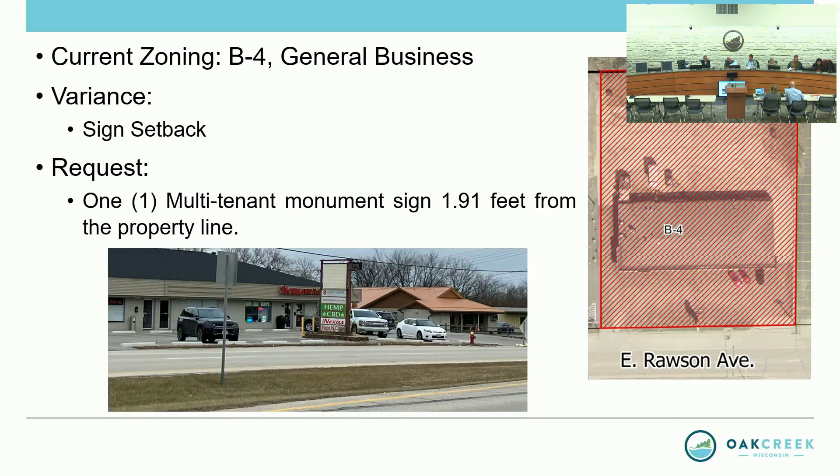They're asking for a setback so that they can have a multi-tenant monument sign that's 1.91 feet from the property line. You can see here's the current sign that they have, and they're proposing to change out the cabinet on that existing sign using the existing poles and base.

You can see that the code requires a 10-foot setback for signs in the B4 district. Here I have a site plan showing the relationship of where the sign is currently and where they propose to keep the sign with the new cabinet.

Its survey shows that it's, again, 1.91 feet, as you can see highlighted in yellow here, from the property line.

The applicant is here to speak on behalf of the variance, and we have the motion for consideration. Thank you. Applicant, do you want to say anything, or wait on questions, sir? For the minutes, he indicated he'll wait on questions. Let's start.

You, Ashley, or Steve? I'll start. Okay, Ashley.

Engineering does not have any concerns given it is going back in the same location that it currently exists. Looking at crash history, there were not any accidents reported at this location. That's one of the first things we'd recognize when you see a sign proposed so close to the property line, but at this location we do not have any concerns with sight or vision or anything to that matter.

Do we have, I know it's a variance for distance from the property line, do we have a requirement for height? Would it also be a variance for height? In the B4, the max height is 16 feet, and this sign is proposed at 13 feet. So it meets the requirements for height and sign area, it's just not 10 feet away from the property line. Sure, it just seems like a very tall sign.

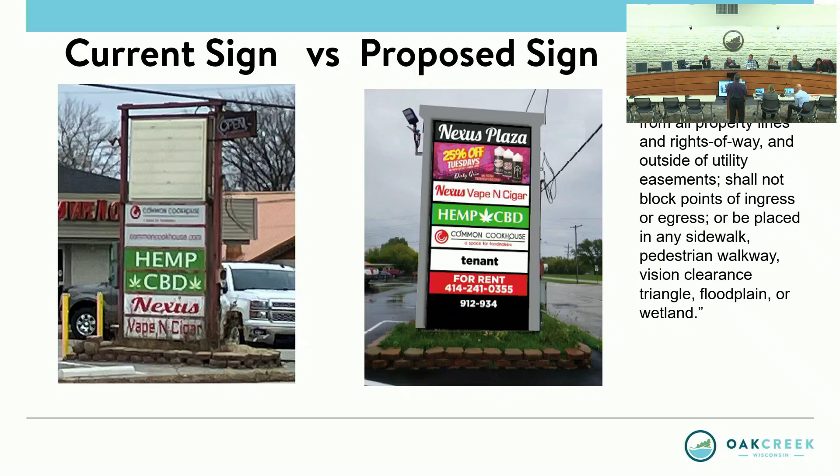Part of the hardship as well is, not only is their meter pedestal already put into place, but if you were to move it 7 feet back, it'd be literally in the middle of the parking lot. Yeah, it would be, I'm familiar with the property, and it's very tight. Thank you.

Ashley kind of alluded to it, knock on wood, there's been no accidents since. Okay, so other than that, that was my main concern, whether we can get those wires underground. They are underground, they're already underground. Okay, wonderful. Yeah, they're just waiting for us to fabricate and install.

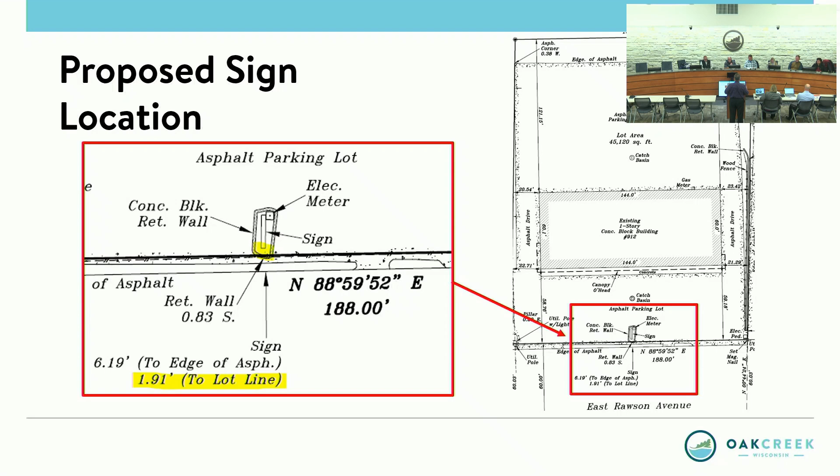Okay, one last hurdle, fire, anything? Okay, we're all good. Thank you, sir, and thank you for your patience. Bummer being last sometimes. That's okay.

So, no further questions or discussion, motion on item 11. Lork moves to approve a sign variance allowing a multi-tenant monument sign 1.91 feet from the property line at 912 East Rawson Avenue. Guzekowski seconds. Roll call, beginning with Ashley: Chinsky, aye. Lork, aye. Kavich, aye. Guzekowski, aye. Anna, aye.

Item 12, site plan review and related plans for revised site modifications at Frulani Foods, an existing business at 7350 South 10th. Christie: Thank you, Mr. Mayor.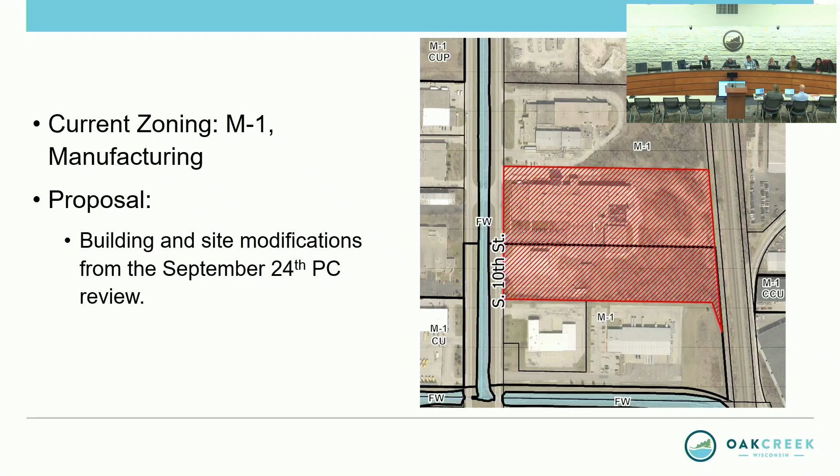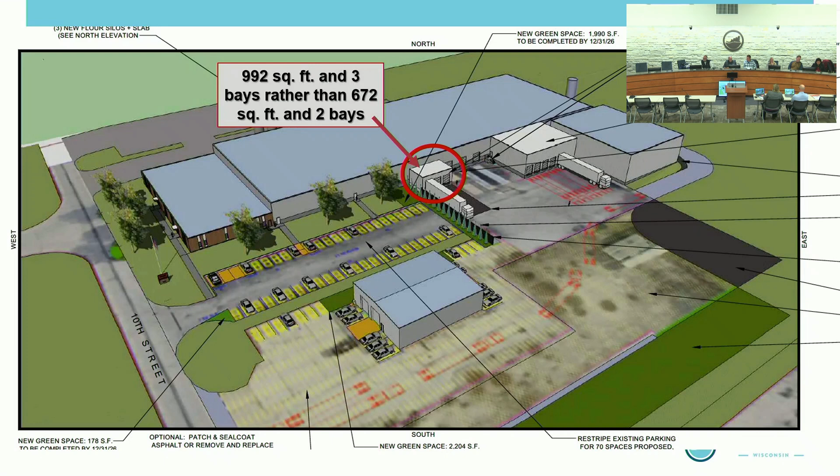This item was before the Plan Commission in September. The applicant, Furlani Foods, made business decisions and modifications requiring Plan Commission approval again. They had applied for permits, staff noticed the modifications, and they were willing to resubmit. Most notably, one addition approved by Plan Commission for 672 square feet with 2 bays has increased to 992 square feet with 3 bays. Here are the renderings of the 3-bay addition on the left side of the screen, also reducing the height a bit compared to what was previously approved.

The yellow highlights indicate a few other small minor modifications. The main one is in the middle — the compactor addition is larger. The landscape wall that will screen the additions is being moved 10 feet west, nothing anyone will really notice. Also, on the north side of the aerial photo, the yellow dashed area is a railroad spur that at our last review was going to be removed — they are now going to keep it.

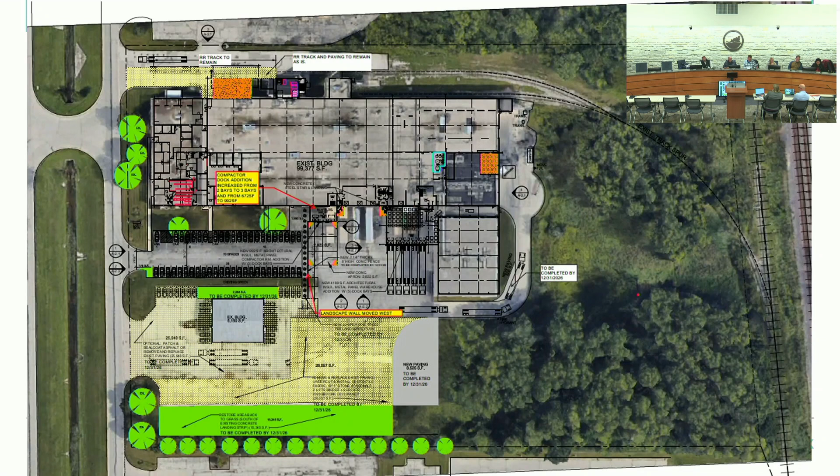So again, just some small modifications to be reviewed by the Plan Commission. With that, the suggested motion is before you. All plans are in good shape and staff has no requested modifications.

Thank you, Christie. Greg? No questions, thank you. Chris? No questions, looks good. Christine? No questions. Steve? No questions. Ashley? No questions. I have none either — it's a nice improvement, looks good. Even with the expanded bay, it's good if business is looking up.

No further discussion, motion on item 12. Lorik moves to approve site and related plans for revised site modifications at Furlani Food, an existing business located at 7350 South 10th Street, submitted by Charles Bleck, Bleck & Bleck Architects LLC, with the following conditions: 1, that all relevant code requirements remain in effect; 2, that all revised plans are submitted in digital format for review and approval by the Department of Community Development prior to submission of permit applications. Guzekowski seconds. Roll call beginning with Greg: Lorik, aye. David, aye. Guzekowski, aye. Hannah, aye. Chinsky, aye.

Item 13 is a zoning text amendment. We're going to review a draft ordinance to amend table 17.0304 sub C pertaining to various restrictions, to amend section 17.0804 sub E pertaining to conditional use procedures, and to amend table 17.0603 of the municipal code pertaining to permitted sign types.

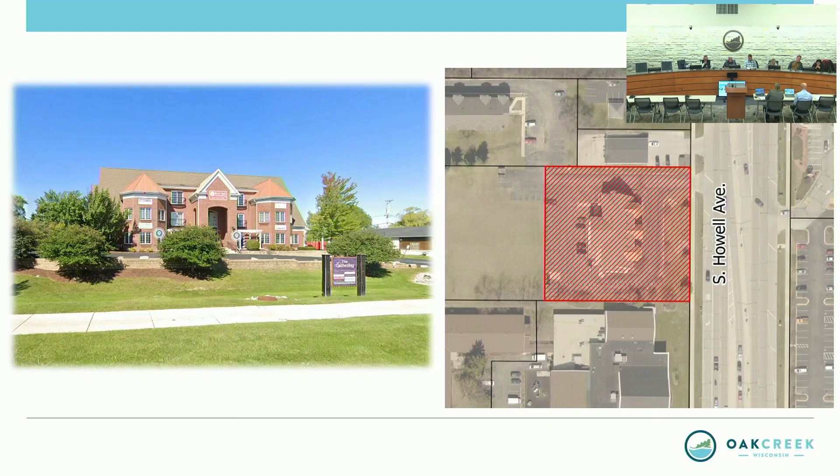Christie: Thank you, Mr. Mayor. This is a housekeeping item. Still learning the Oak Creek way and how things were done, but this is for that commercial property on Howell, the office building, if you will. This was before the Plan Commission last month in December, and state statutes require that when a comprehensive land use map amendment ordinance is adopted by Plan Commission, the recommendation must come in the format of a resolution from the Plan Commission.

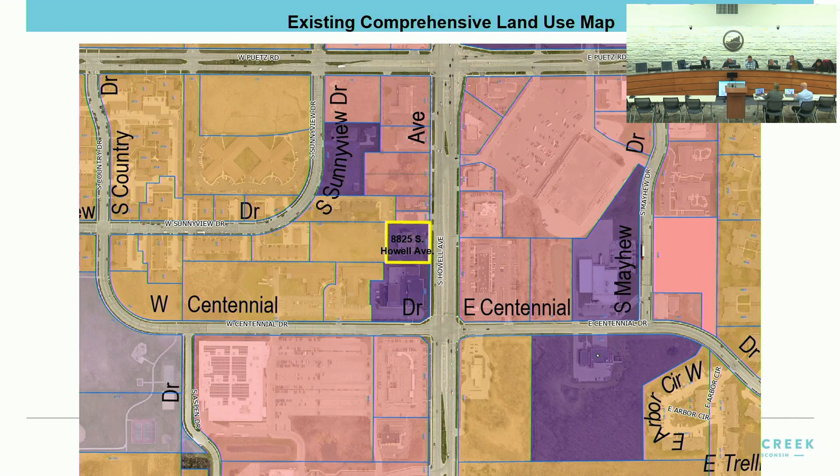So again, just a housekeeping item. What had been done in the past - and I didn't catch it easily - is that the resolution approval by the Plan Commission was simply done in the motion; it wasn't a separate agenda item. So from here on, we're going to do a separate agenda item for the resolution. We'll have another one come before you at the next Plan Commission meeting. But for housekeeping purposes, an actual resolution needs to be adopted by the Plan Commission. Any questions concerning this item? Kind of went over this already, and the document is what I gave to you, Mr. Mayor. Thank you, there's no further questions.

Motion on 14. Clerk moves to adopt Resolution Number 2025-1, amending the City of Oak Creek 2020 Comprehensive Plan land use category from public/semi-public to commercial for the property located at 8825 South Howell Avenue, submitted by Brian Jermel, B&B Investment Properties, LLC. Sikowski, second. Roll call, beginning with Chris: Sikowski, aye. Hannah, aye. Mulch, aye. Chinsky, aye. Lorick, aye. Gavich, aye.

Christie: Mr. Mayor, if we may, please go back to item number 3, approval of the minutes. I'm sorry I didn't catch this as we were making motions, but Alderperson Lorick had made the motion, but I don't believe you can, since you were not present at that meeting - I think you have to abstain from the minutes. So I think we need to go back.

We can still do it - I don't know if it matters. I did ask the city attorney previously, and she said you're just approving the minutes, it doesn't matter. Then forget I said anything. Okay, I learned something new. Thank you, I'm glad you mentioned that. Okay, never mind, forget it.

Before we adjourn - for the first time in 18 weeks, you have your Sundays back because the Packers did not advance in the playoffs. Or if you're a true football fan, you're going to be watching it anyways. If not, enjoy your Sundays from here on out, I guess, until next year.